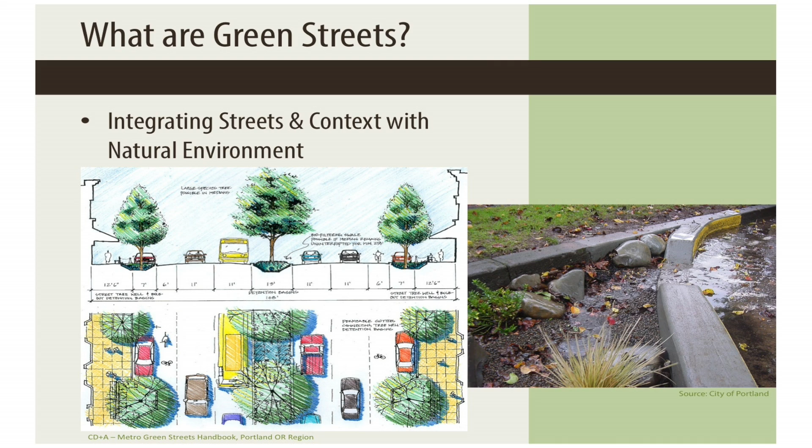So what are green streets? It's the idea that we can integrate the streets in our urban areas with the urban context, but also with the natural environment, so that we can design streets to function more as part of the natural environment.

As Ken said, there are reasons we want to do this, very obviously from a water quality standpoint. These are the kinds of things you see after that first flush or after a good period of drought, where you get all this debris trying to get into the storm drains, and as Ken said, often going right into the bay.

It's also about localized flooding. Our storm drain systems don't always perform the way they might need to, just from an engineering standpoint, and we can get localized flooding happening. I think particularly with the kinds of storms we're seeing increasingly, we're going to see more high-volume storms and probably more and more flooding.

There's a whole regulatory and policy framework to this—there's a reason jurisdictions go about doing this. When we say we worked on the Green Streets Handbook for Portland, everybody tends to think, oh, well, that makes sense, Portland, Oregon, of course they'd be thinking of doing something like that. But when we worked on the manual, there were specific federal regulations, state regulations, and impacts to endangered species forcing them to deal with these water quality issues coming from their streets, because salmon and other endangered species spawn in the urban creeks of Portland. So they had to improve the water quality, and that's why they were looking at it.

Philadelphia, because they have combined sewer systems—there's a lot of regulation leading jurisdictions to look at these issues of green streets and how to deal with water quality. We're under the same kind of regime in terms of these policies. In San Mateo County and in the city, there are opportunities to look at some of the watershed issues and localized flooding. San Mateo County actually has one of the more recent and state-of-the-art design guidebooks for green infrastructure, the Green Streets and Parking Lots document, and I'll be using some examples from that this evening in talking about green streets.

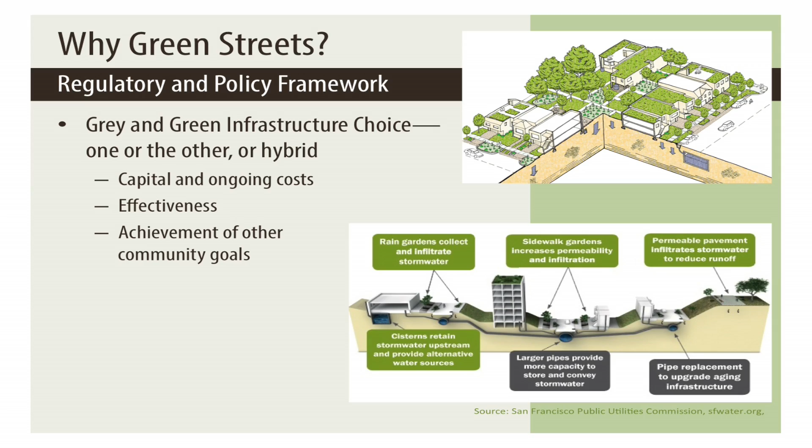So we have this water quality issue that we need to deal with, and there are different ways we can deal with it. We can engineer our way out of it if we wanted to, by just building more storm drains and using filters on those storm drains to improve water quality. But one of the things we've learned over time is that these can be very expensive pieces of infrastructure to build and maintain. Green infrastructure has the potential to be more affordable in terms of capital cost and potentially even in terms of ongoing maintenance costs.

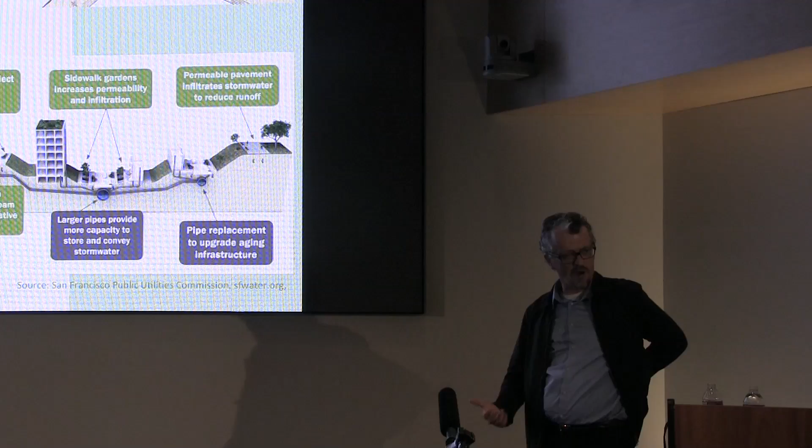It can be more effective in some cases, but it can also help achieve other community goals. This tension—what has really been laid out in the engineering world and from a policy standpoint—is a bit of a tension between green and gray infrastructure. It doesn't necessarily need to be that way, and there are more jurisdictions looking at these issues and finding hybrid approaches.

Last year, I was doing work for US EPA, going around the country doing presentations in jurisdictions. Cities applied for technical assistance, and we'd go out and provide that assistance. The area I was focused on was green streets—really about operations and maintenance of green streets, and how to get public works departments and parks departments working together with the water department to implement these systems in an effective way.

In Dayton, Ohio, they were doing some really interesting work, cutting edge thinking about green infrastructure. They're updating their citywide water plan, and in doing it, they asked the consultants to look at opportunities to implement green infrastructure, but look at the cost implications. So they've done studies looking at case studies in different parts of the city where there are water quality or flooding issues.

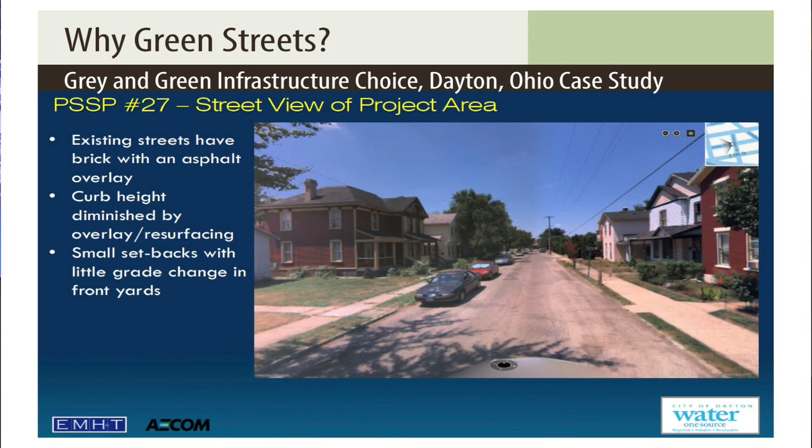This is one neighborhood that they looked at, a historic neighborhood. Underneath that asphalt is brick paving. Originally this neighborhood had brick streets. You can see there's about a 2 to 3 inch curb there, because over time they've just continued to lay down asphalt. But there are issues with flooding here, and they wanted to look at some different approaches.

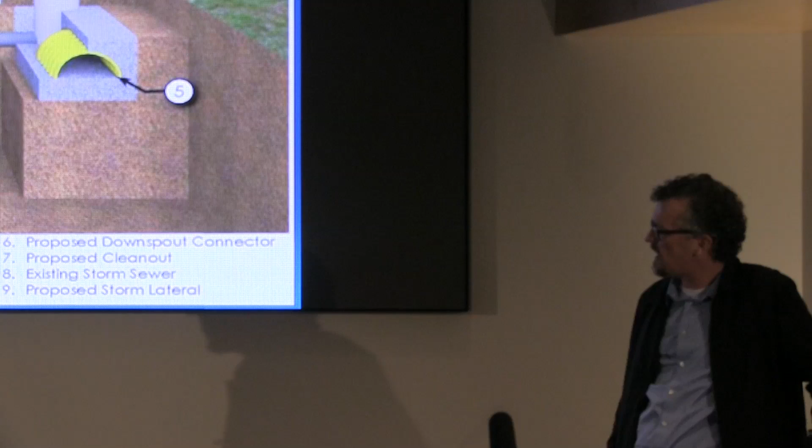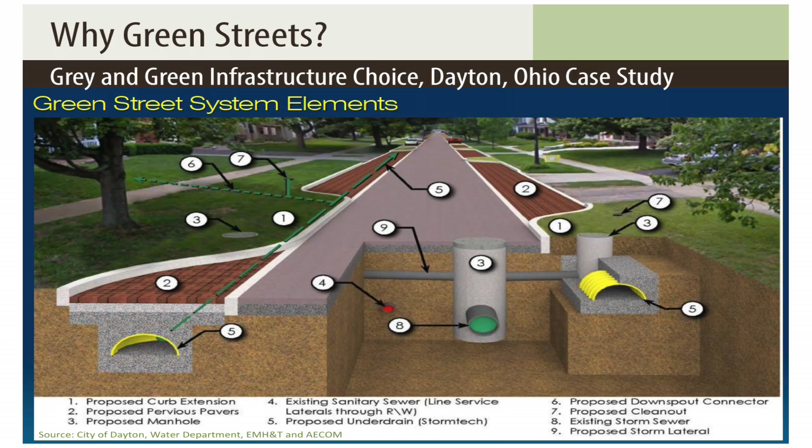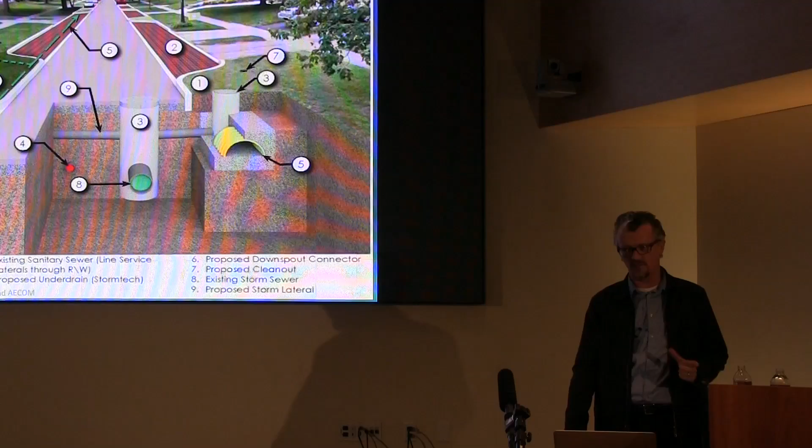One thing they looked at, and I'll talk more about this technique later, is the idea of repaving with porous pavement. Underneath, they can design the roadbed and other infrastructure to increase water storage capacity. So rather than building a big concrete pipe or having to take down historic houses to build a detention basin, they're looking at redoing the streets to improve the stormwater system and fit it to the context, a mix of green and gray infrastructure to achieve that goal.

There's also a set of things that green infrastructure can achieve related to general smart growth or community livability goals. You can be more efficient with the use of the land, you can use natural processes, and as I said, it can be more cost effective.

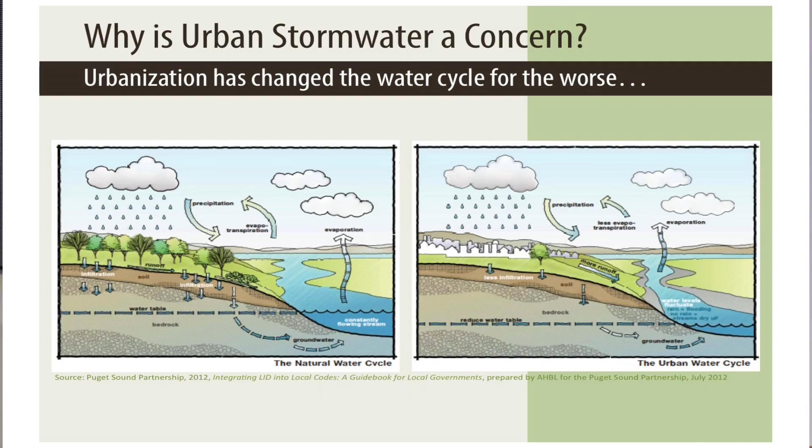Why are we looking at this issue? What is it about urbanizing that has led us into building cities, that has led us into this? This is the natural water cycle. If you think back to elementary or middle school, you were taught about the water cycle. It rains, lands on the ground, eventually percolates through, works its way into waterways, evaporates, forms more clouds, rains, and that's the natural cycle. Well, what happens with urbanization is we affect the concentrations of flows, we add pollutants, we raise the temperature of the runoff, and do all these things that affect that natural cycle.

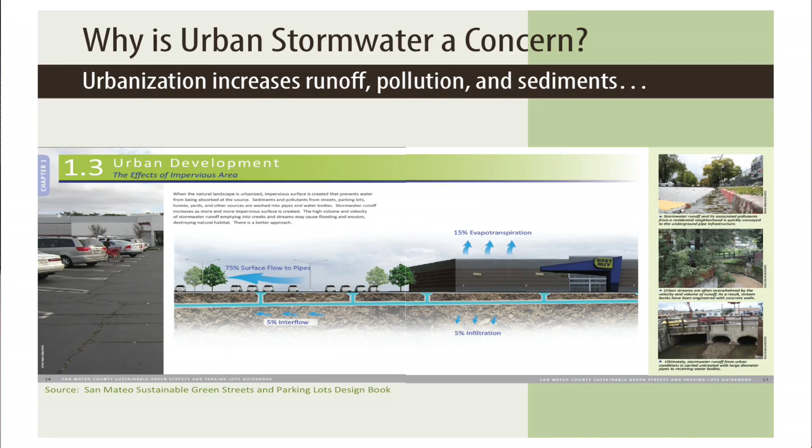So these diagrams from the county plan get into some of the details of this. What is a more natural situation? How does absorption, plants using the water, evapotranspiration going back up into the atmosphere, creating clouds, that cycle we're talking about. But this is what happens when you urbanize: you concentrate flows, you get them into pipes, you're not recharging groundwater, you still have evaporation and things, but you're really seriously affecting the more natural system.

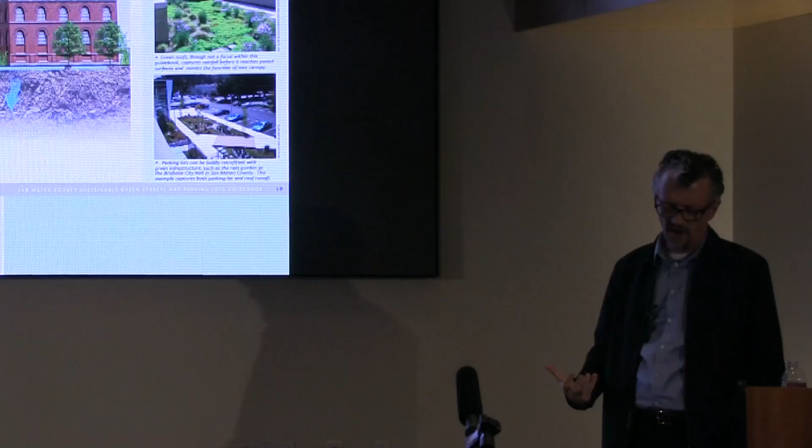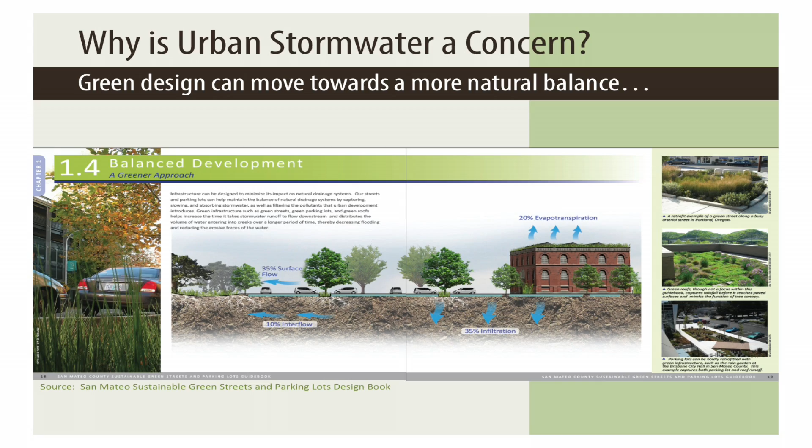So the idea of green infrastructure, and it's not just within streets, you also can look at green infrastructure within private development, green roofs, those sorts of things, is taking the way that we live in our cities and build in our cities and trying to make it function more the way that natural systems have tried to do. A lot of this is about the introduction of more landscape, and it's because of that introduction of landscape that we can get at other goals that communities have.

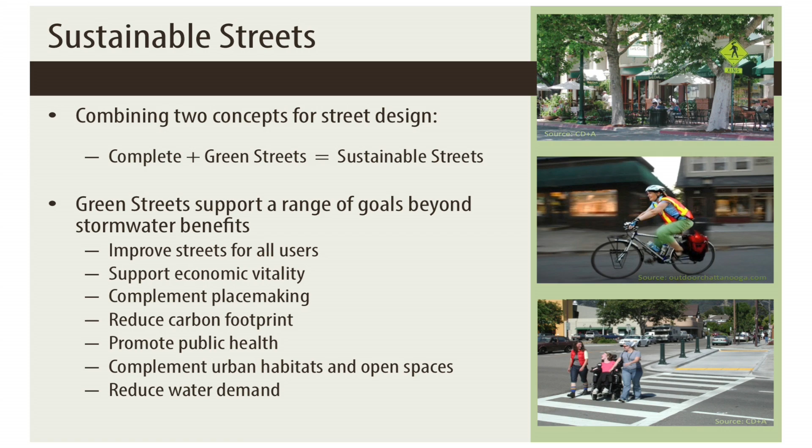The city of San Mateo, in thinking about this issue of sustainable streets being the combination of complete streets and green streets, is the new cutting edge of thinking about more complete streets, how to really integrate these two ideas so they're more effective. Because the introduction of green streets concepts into the streets, providing more healthy landscape, can improve the use of streets for all users, support economic vitality, and a whole set of other community goals. So let's look at what some of those aspects are.

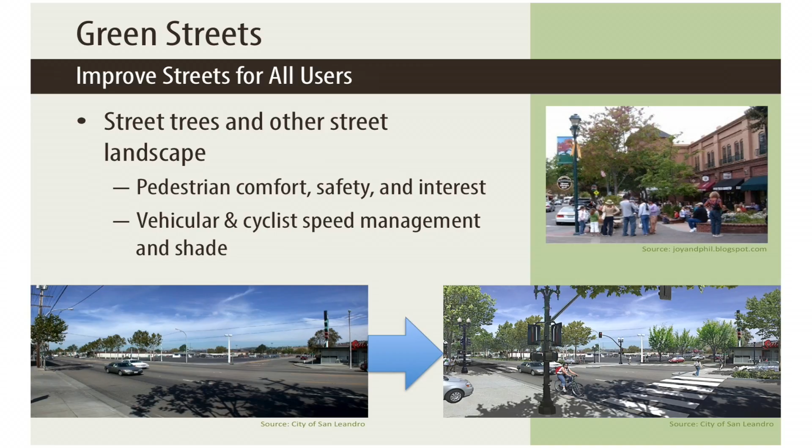Here you see the simulation of some improvements to a state highway in the city of San Leandro. By improving the landscape, changing the cross-section of the road, we can make it better for bicyclists, better for transit. It still functions well for vehicles, but we have more landscape and more trees. One of the things we heard from developers who might look at building on underutilized properties in this corridor was that improving the street, adding landscape, was one of the most effective things the city could do to encourage them to develop in this corridor, transforming it from an auto-dominated corridor.

Trees in and of themselves, creating these more walkable environments—there's been research about this, looking at retail sales and rents. On the order of a 3 to 15% increase in home values if you look at a similar type and size of house on a similar street, with the main difference being more street trees and that more walkable environment.

Similarly, retail districts will show higher sales when you have a walkable, well-landscaped street environment. The streets are a nice place to hang out. I'm going to go there and meet my friends, and I might end up spending more money while I'm there too. So it makes it a more attractive place. There's also a relationship between landscape, access and views of landscape, and employee happiness.

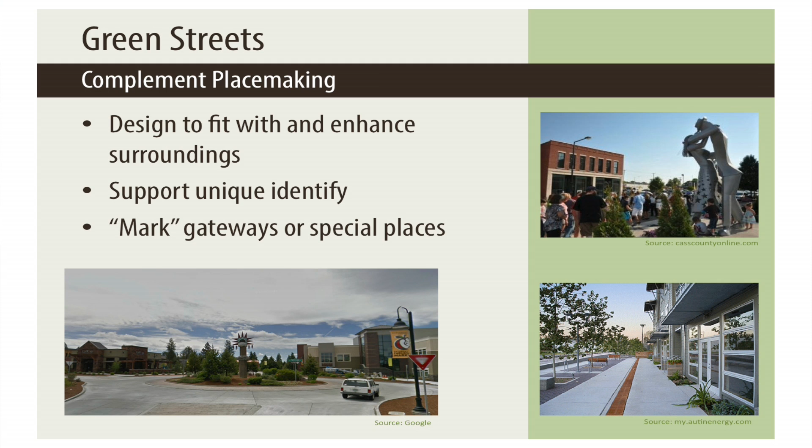Placemaking—this idea of enhancing the quality of our cities and the special places within our cities. Landscape in streets is an important part of that.

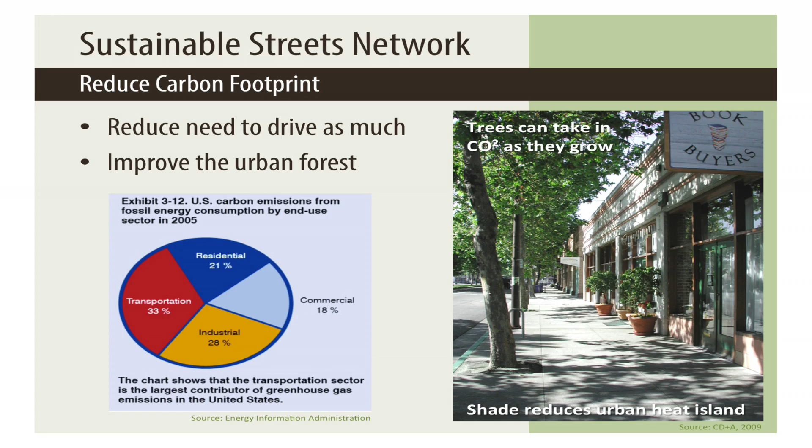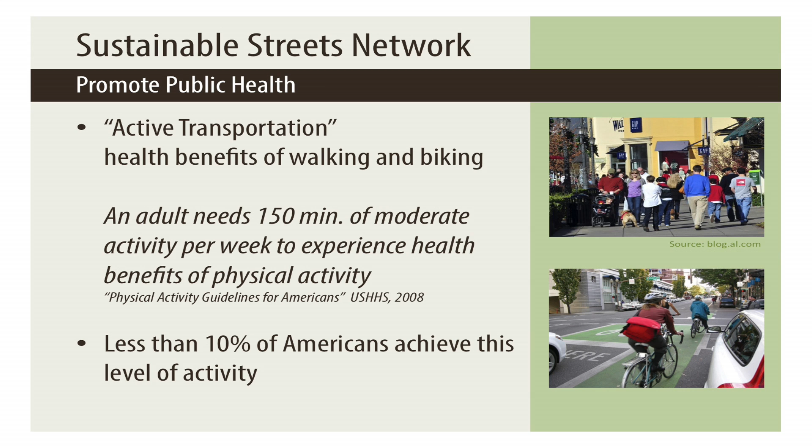Reducing carbon footprint, reducing the temperature of urban environments—all of these things can help with carbon and climate change issues. Public health: we've all heard about this more and more, the idea that active transportation is something we really need and that can help the health of our communities. The idea of 150 minutes of moderate activity per week as a way to improve your health.

Making more walkable streets is an important part of that. Less than 10% of Americans currently achieve that 150 minutes. The last couple of weeks I haven't been biking to work, and I'm feeling like I'm not achieving those 150 minutes.

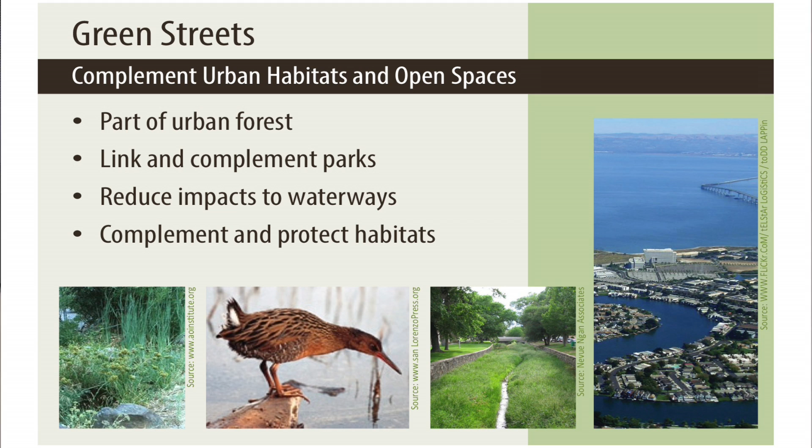There are other environmental and urban habitat issues related to greening streets—the urban forests, some of those benefits of reducing temperatures in urbanized areas, providing linkages to parks, all of these kinds of issues as well.

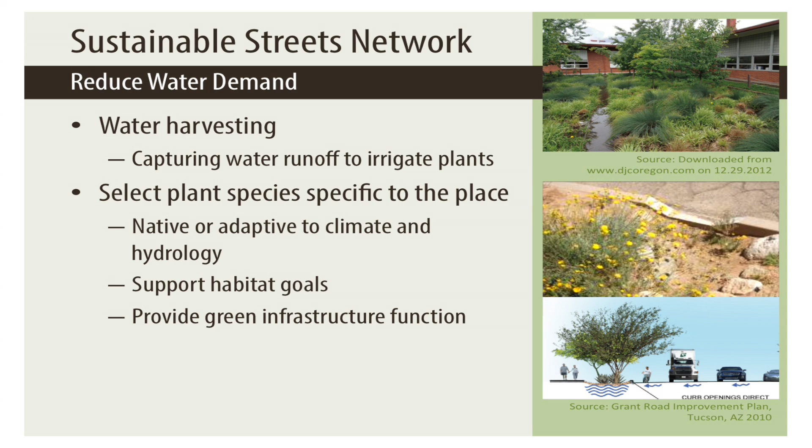But there is also the side of reducing water demand. There's this idea of what's called water harvesting. I've done this kind of work, and I'm doing this kind of work in the desert Southwest, and that tends to be the way they talk about what we call green infrastructure—it's about harvesting the water to use it for the street landscape.

And in the kinds of rainfall patterns that we're going to be seeing in California, I think that aspect of water harvesting is going to be more and more important.

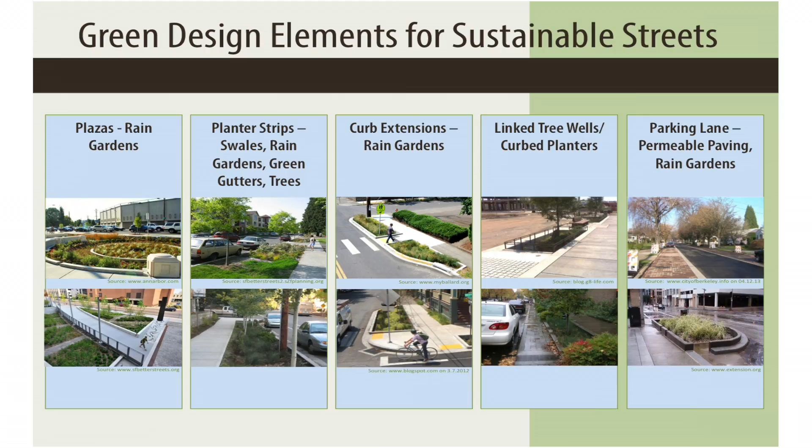For our work on the Sustainable Streets Plan, we've been starting to think about what are the types of green design elements that can integrate into the sustainable streets. So I'm going to run through some of these.

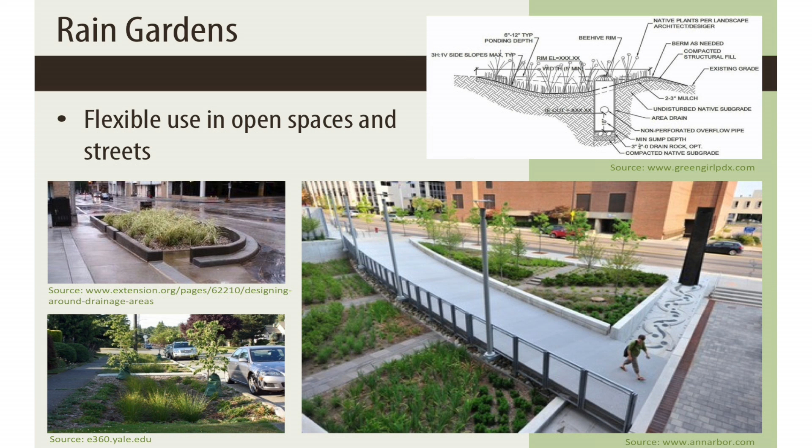One of the basic components is what's called a rain garden, and this is a very adaptable concept. Rain gardens can be large, like you see in this public square in front of a city hall, or they can be more linear and along a street in sort of the tree lawn area between the sidewalk and the curb, or they could be out in the parking lane and integrated into bulb-outs like you see here.

And those of you that were at the Complete Streets talk—the idea of bulb-outs shortening crossing distance—those also create great opportunities for introducing green infrastructure, and that's what you see here.

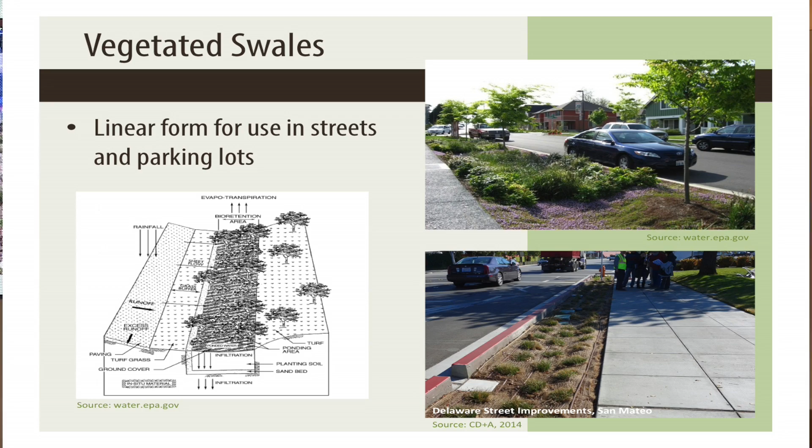The vegetated swale—this is a more linear form of green infrastructure, something you may have seen. It's tended to be the more typical type of structure on Delaware Street here in San Mateo. There is that form of that linear piece of landscape.

The water comes in through the cutouts in the curb, flows into that, is treated by the plants that are there, sediment can settle out, and where the soils work for it, you can also get infiltration into the ground and reduce total runoff—but at a minimum, you want to spread the peak flows.

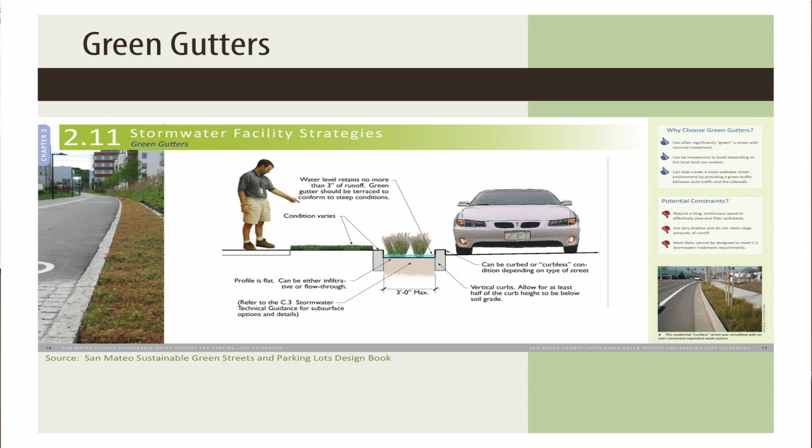It's called green gutters—the idea that you could just take a narrow space between the travel lanes and what would typically be the curb to have the water flow off of the street and again slow down, having the chance to be taken up by some of the landscape and get a little bit of treatment.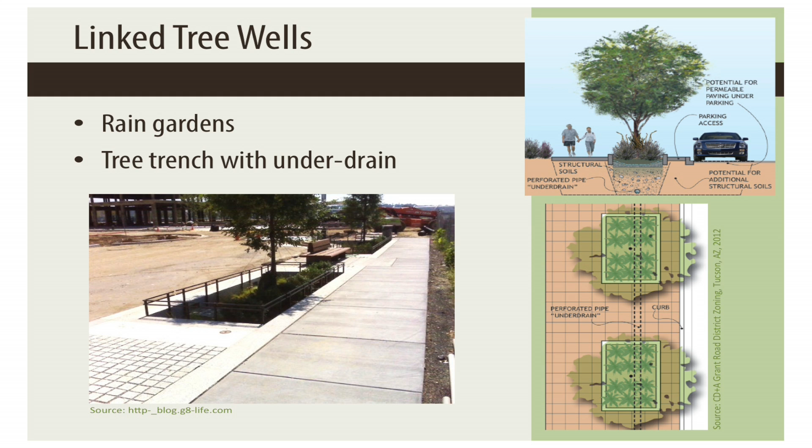You can also do more urbanized treatments. This idea of linked tree wells is that you can have these smaller rain gardens with trees in them.

Maybe have pervious paving in between the sidewalk, so you're getting some water going down in. Then you can put a perforated drain pipe in between these rain gardens, linked underground so you're getting increased water storage. Spreading the peak flows is a really important aspect of doing green infrastructure.

You can see in the sketch at the top, that's one of the projects we've done in Arizona, and they get very high peak rainfall. So you can even extend the water storage under the sidewalk or out into the street, along the lines of what Dayton, Ohio is looking at.

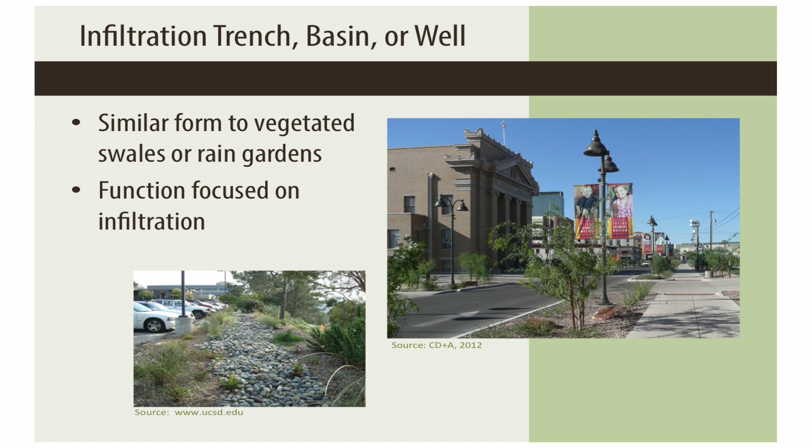Infiltration trenches, basins, or wells, if the soil and hydrology will work for you, can recharge the ground and groundwater system if the water will actually percolate well. A lot of areas in San Mateo have that muddy bay soil, and you're not going to get this kind of infrastructure, but there could be places where this can work.

Trees, just in and of themselves, are an important part of green infrastructure. In the work we did in Portland, there's a whole supplementary manual about trees and how they can function as part of the stormwater system.

Selecting the right species, so just the leaves or needles of the tree can hold water and allow it to evaporate or at least slow down the flows. The bark of the tree can slow down the water flow, and of course the trees can pull up a lot of the water through their roots. So a really important part of thinking about green streets.

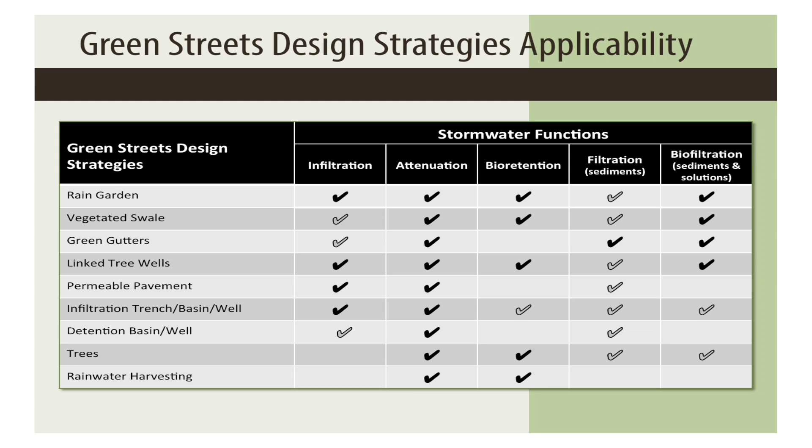So there are different stormwater functions that different pieces of this green street strategy can perform - infiltration, retention, slowing down the flow of water, treating the water. Different elements of the green street will function better for different purposes, and when integrated into the street, they fit into different parts of the street as well.

As the design techniques for green streets have really been advancing over the last 12 to 15 years, one of the issues that's become apparent is operations and maintenance. We've talked a bit with the City of San Mateo about this, and we're hoping through the work we do that we can advance the discussion. This was really the focus of the work I was doing for US EPA.

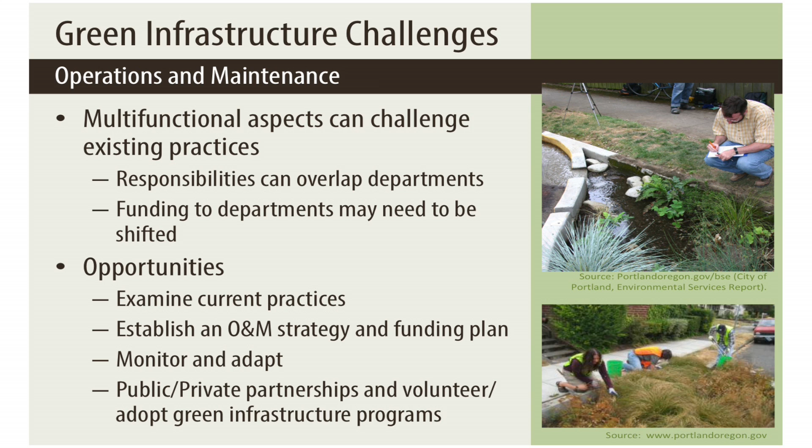What happens is now we're taking landscape within the roadway, and if a city has a forestry department or parks and rec department, they will typically end up maintaining those. Sometimes it's a division of public works, but it's increasingly rare that that's the case. Also, cities in general now tend to not have enough funding to maintain trees. So we come into cities and talk about greening streets, and certain departments say, what are you doing? We can't even maintain the trees and landscape we have.

But it's providing a stormwater function. So is it possible to engage the water department or another side of public works and change the way money flows within the city, and sometimes even between agencies that might have different boards and not be directly connected through local government? There's a whole aspect of getting more efficient, multiplying the investment, finding the appropriate people, and really having to structure new operations and maintenance plans.

But as some of the larger cities in the country, under order from US EPA, are having to aggressively look at these stormwater issues, they're more and more advancing information about operations and maintenance. There are great manuals and increasing experience in making these things work. There's another aspect of green streets about thinking about them as part of the open space system - thinking about streets as part of the civic space of cities.

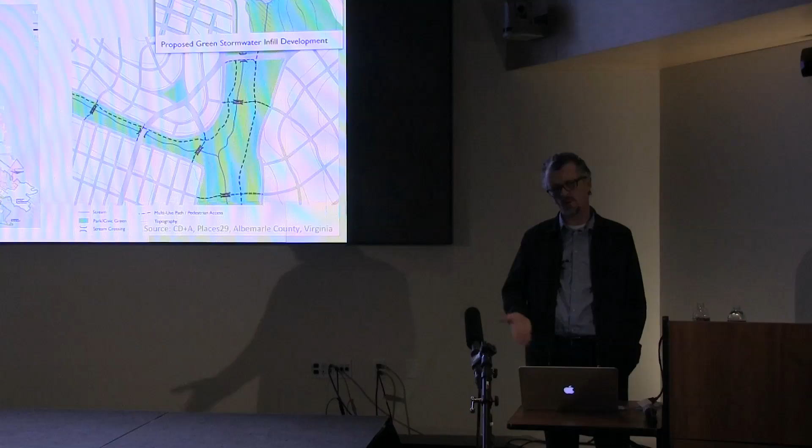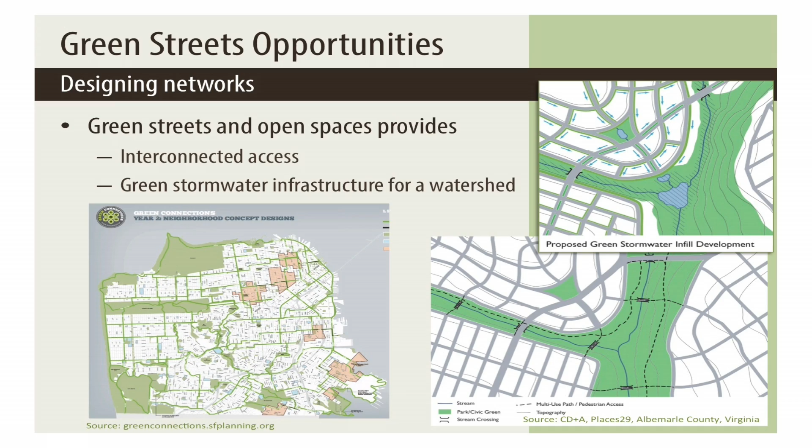Typically in a city, public right-of-way and streets make up about 25 to 30% of the total land area of a city. And over the last 40, 50 years, we've been busy turning that over to automobiles. Now people are starting to rethink—wait a minute, this is an important part of the civic space of our cities.

So how can we think about streets and green streets, linking parks, and even providing recreation space for our neighborhoods and commercial areas? We need to think about the context we're designing in. Different design details and green street elements make sense on different kinds of streets and in different parts of our cities—are we downtown, in a mixed-use corridor like El Camino Real, or in a residential neighborhood? And what kind of residential neighborhood? What is the feel of the neighborhood? How can we develop these appropriately?

I wanted to touch on one aspect of the implementation side and start talking about some of the opportunities for being more efficient and doing some creative things in our cities.

There's tended to be this issue in thinking about stormwater—that once rain falls on the ground, whoever it fell on owns it, and it's their responsibility to treat and manage it. So if water falls on private property, a city or water quality board will say, okay, private property owner, you need to deal with the volume of flow off your property and the water quality of it before it comes into the public system.

Increasingly, we're seeing cities given responsibility for doing something about the water that falls on their streets. But again, it tends to be: deal with your water from the streets, on your streets, or on other public land. Then we have smart growth policies saying, let's densify, let's do infill, let's do things that are a little more dense—but oh, by the way, you need to have some water retention on your property, so sorry, you're not going to quite achieve that density goal we were hoping for.

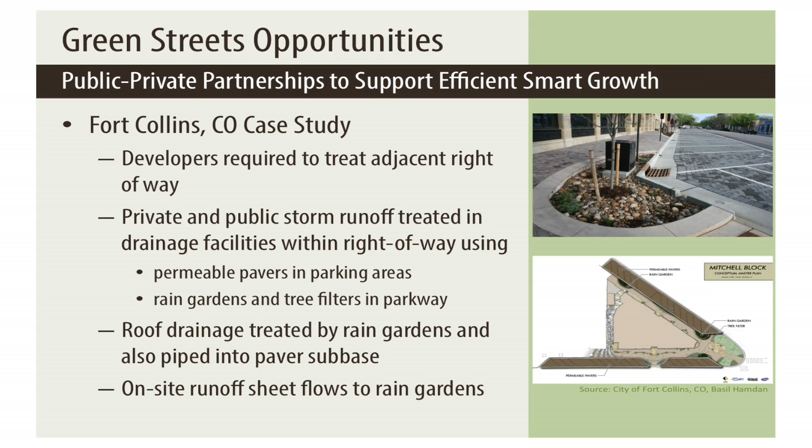They did permeable paving in the parking, with water storage underneath it. There are rain gardens to do some treatment, and roof drainage actually comes right into those rain gardens and is piped into that reservoir underneath the parking to slow the total flow off of the property. Then they worked through an agreement.

The developer built the infrastructure, and the city subsidized it a bit. The developer indemnified the city for most stormwater-related claims that might come up. The building owner maintains the landscape, the roof drains, under the sidewalk, and all of the sub-drains, but ultimately the city is responsible for the long-term replacement costs. They looked at all of these cost aspects and came up with an approach.

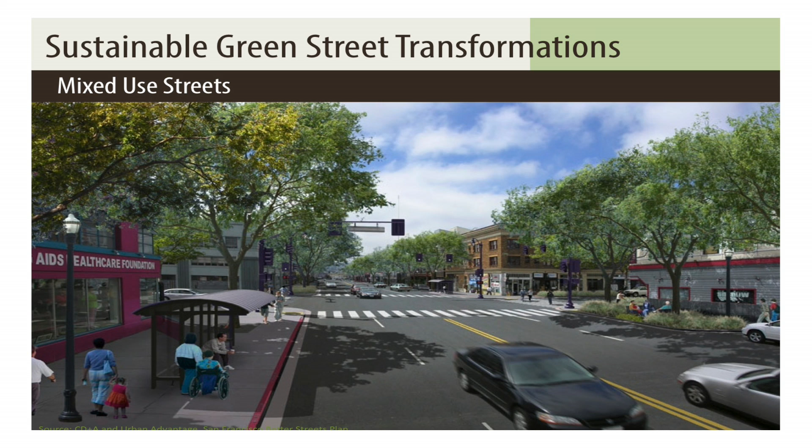And actually they did end up deciding to do some dedicated lanes for bus as well. But you can see some of the complete streets improvements, bulb outs to shorten distances across the street. But then you can take that bulb out and integrate green infrastructure into it, put in trees that can take advantage of having the storm drainage go into their planters, providing irrigation and healthier trees.

Even in the Sunset, which is not known for great streetscapes, I don't think, there are some opportunities. So some ideas here: you can do traffic calming and have landscape in the middle of the street.

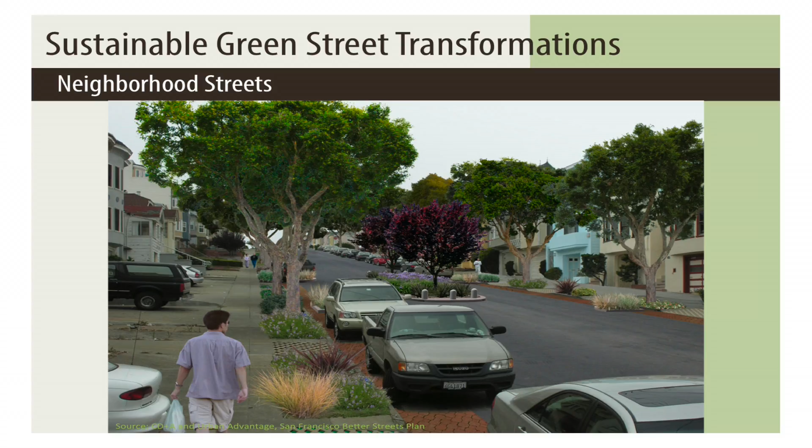Maybe here, rather than that idea of green gutters, it's a pervious paved gutter, allowing the stormwater to come into the gutter and percolate in. Taking the apron of the driveway and doing pervious paving on that.

Taking the planting area, and again, lowering it a bit. See what can happen here in the reconstruction: from that edge of the pervious paving to the edge of the planter, you just have to come in and trench through that and do some soil treatment so that you can get more volume for water storage. It also creates more airspace so that it's healthier for trees and the landscape.

So you're building upon a basic move that's to deal with water quality and creating a healthier landscape. Those are really the ideas of what we mean by green streets.

A couple of other things to touch on, just thinking back to the examples I showed you. As you're going around San Mateo or wherever you live, look at the streets you're on and what sort of landscape is there. When do you find yourself on a street and you kind of relax? Is there something in the landscape helping you with that? You can see here, just having those flowers, having a sense of season, creates a better pedestrian environment.